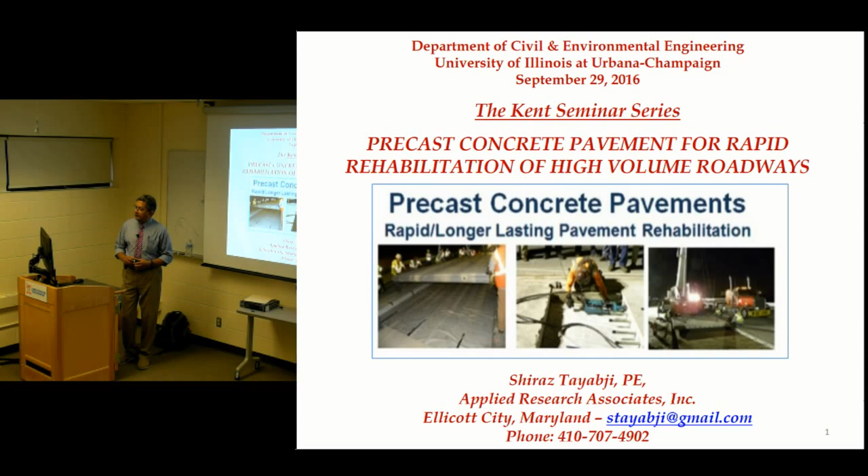But anyway, it's good to be here, and hopefully this discussion on this new technology will give you some hope for future work in this area. It's a developing area. So let me start.

This is a new, recent development, and this has been in place about 15 years. We are still developing and refining the technology, but a lot of people are not aware of it. So I'm just going to give you a pretty good overview of all the different aspects of this technology, instead of just focusing on one and going into much more detail.

We'll talk about the applications and the systems. When I say PCP, it refers to the precast concrete pavement systems. And then some technical considerations and design considerations, panel fabrication, and a little bit on performance as time permits.

I usually have more material for presentation, so as I see somebody raising a hand saying stop talking, I'll stop talking, or people start walking out of this room. So let me start. If you have some questions or need clarification, please raise them. We won't get into detailed discussion — we can leave that for the end.

So basically, the issue that I'm going to be talking about deals with our highway systems with a lot of heavy traffic, typically in urban areas.

How many of you are from the Chicago area? Or any urban city? How many of you have gone to Chicago? Okay, most of you. So what is one of the concerns if you are driving into Chicago? You worry about traffic, you worry about congestion. Even on nice days when there's no construction work, there's still congestion.

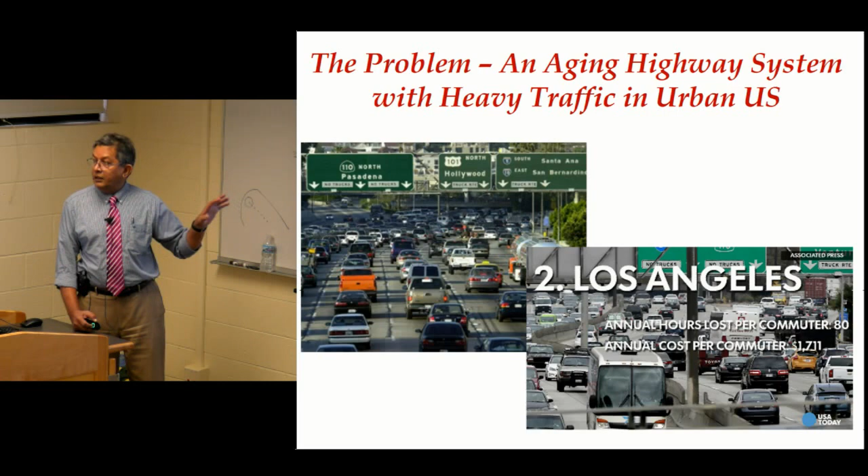So what we have been doing in the past, we need a solution for this rehabilitation. We have to upgrade our highway system, basically the pavements. We can't afford to do it the normal way, okay? Especially on the concrete pavement side.

So typically we say we can do short closures, typically nighttime work, and open to traffic by 5 or 6 in the morning. We have been using rapid setting concrete, but that has not always performed well. So we are always taking a risk, and we are coming back after a few months to a few years. So we are basically fixing the fix.

Now, if you want to do it correctly with concrete, and this applies more to rehabilitation of concrete pavements, we can get longer service life, like 20 years, 30 years. But we have to have longer closures because we need to cure the concrete for 3 to 7 days or more, and we can't afford to do that, okay? So the solution is short closure and longer service life.

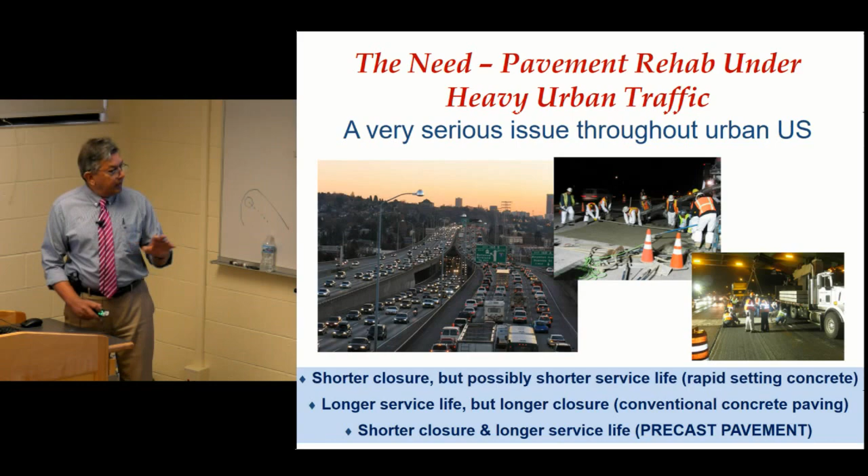And precast pavement, we know will be able to provide that. So we're looking for short closures, typically nighttime closures, but expecting a longer service life, okay?

So the definition of precast concrete pavement is a pavement system that is fabricated and assembled off-site. So we are casting the concrete off-site into panels, okay? Panels like this. So if you can assume this is a concrete panel, we are preparing it off-site, curing it off-site. When it's time, we bring it to the site, we place it, we can have traffic on it the next morning, okay?

So the system's components require minimal curing time because we are still using some grout and so forth, as I'll discuss later on, for the dowel bars and for under the panel itself. The curing time is like 2 to 4 hours, still during the nighttime, and we can still manage to open to traffic by 5 or 6 a.m. in the morning, okay?

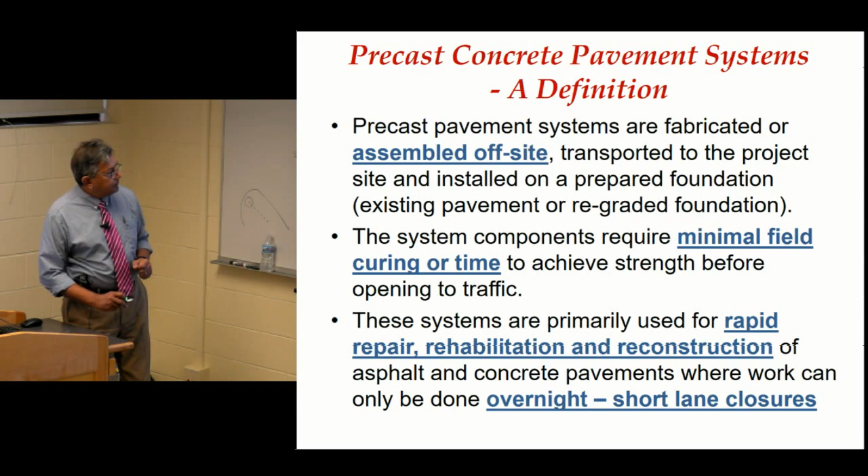So I'm talking about some applications and the systems now. This is a recent technology. We have been using it on a production basis since about 2001, okay? And it's used primarily for rapid repair, rehabilitation of longer lasting pavements or treatments.

If you can afford to close, this is slightly more expensive, but the costs are coming down. So if you can afford to close your highway and do conventional repair and rehabilitation, maybe this is not the right candidate. But if you do not have the time, or you cannot afford to do the lane closures during daytime, this is a candidate you have to consider, at least the highway agencies have to consider.

As I mentioned before, panels are fabricated off-site, transferred to the project site, and installed in a prepared foundation. Only minimal field curing time is required, typically nighttime work, short work windows. We basically start closing the lanes at about 8 p.m., and then we are expected to open it to traffic by 5 or 6 a.m., depending on location and so forth.

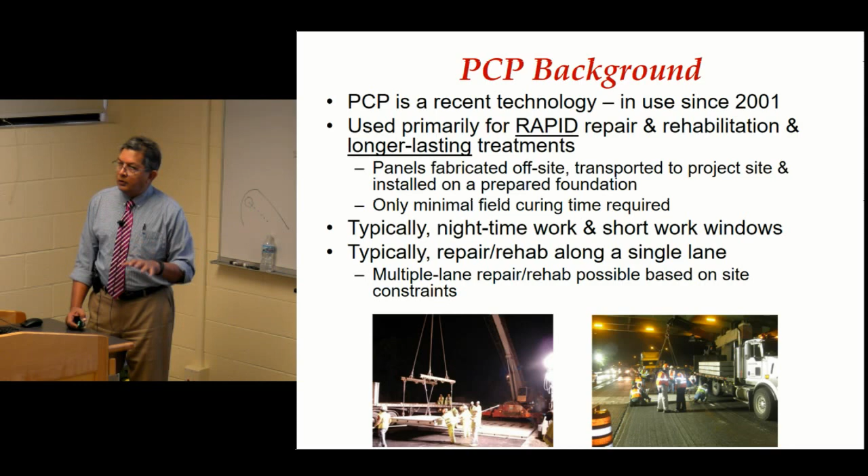Okay, so we are basically using this for heavily traveled mainline interstate pavements in urban areas, and also for ramps, where we have a single lane ramp in an urban area, we can't afford to close it, then we would be using this technique.

And we are also beginning to use it for intersections, bridge approach slabs, underpasses, bus pads, and so forth. Not much application yet on the airfield side. We have had 1 or 2 projects, but it hasn't progressed much yet.

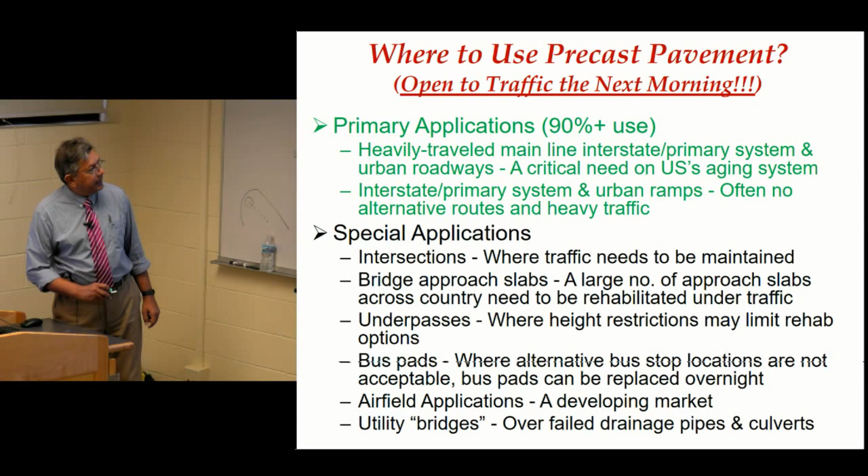So these are the states where we are actively using this technology. It's not something that's still experimental or in a development state. California, Utah, Illinois Tollway, New York, New Jersey—this is their bread and butter rehab technique. When they have a problem on their pavements, especially concrete pavements, or heavy volume asphalt intersections, this is their primary strategy for correcting those issues.

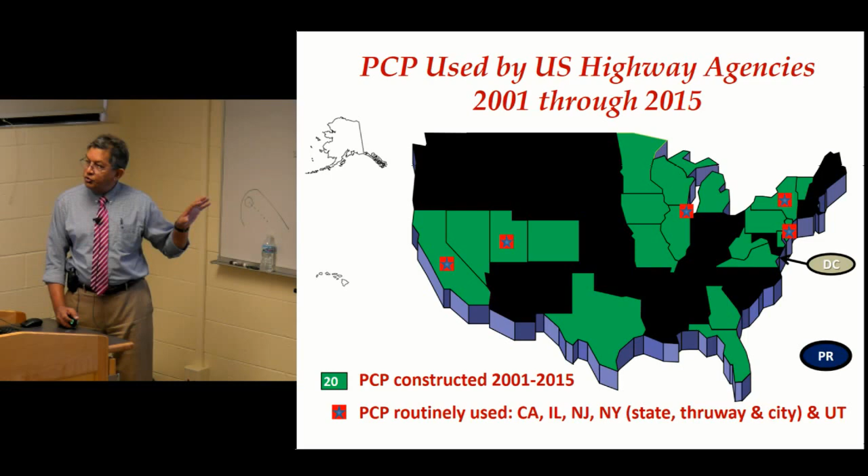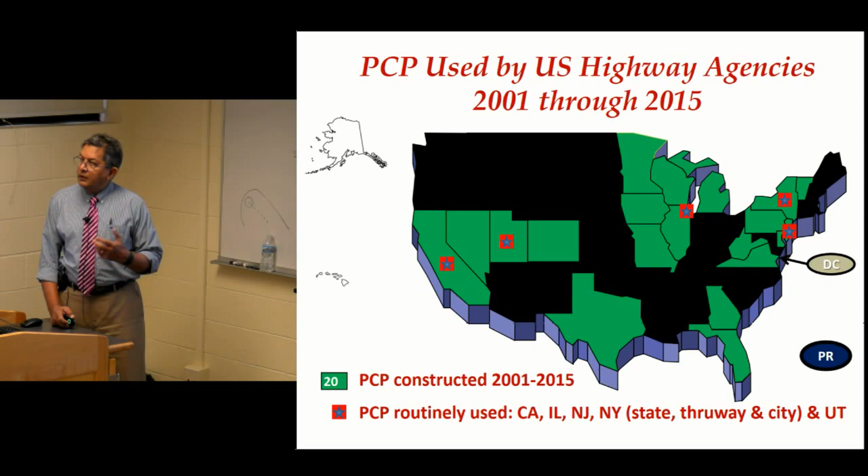The other states, shown in green here, they've already done some demonstration projects, and they're considering production use of this technology.

So this is the application. We are doing full depth repair, full slab replacement, or full depth repair where the problem is only at a joint. This is called intermittent repairs, or just repairs, or we would do continuous repairs, so a single lane replacement or a multiple lane replacement. Keep in mind, all of this work is being done at night.

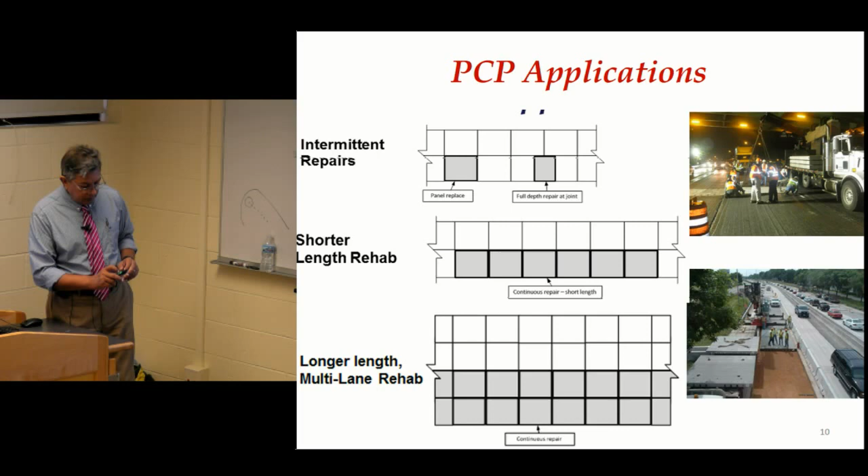Just another look at what we are trying to do. When we're doing the repairs, basically we are opening up the hole, taking out the damaged, cracked, or distressed concrete, preparing the base, installing dowel bars, and bringing the fabricated panel at full strength, placing it into the hole over the dowel bars.

This is one concept with the dowel bar slots at the bottom. In another concept, we have slots at the top. That also works. Then we come back and grout the slot hole with fast-setting patching material, and we also apply some bedding material, undersealing, so the panel makes full contact with the grade or the base.

Do you normally have a dowel on one end of the slab and then slots on the other? How does that work? In the repair application, we have dowel bars drilled and grouted at each joint face, and you'd have slots at both ends because we are just doing a single panel. When it's a continuous application, you'll have the slot at one end and the dowel bar at the other end. We just set them next to each other.

I'll show you the schematic, so that's where it is. This is the continuous application. We'll have a panel with dowel bar at one end and slots at the other end, and we can have slots at the top or bottom. Here there are slots, and this one has dowel bars. We would be patching or grouting the slots in a similar manner.

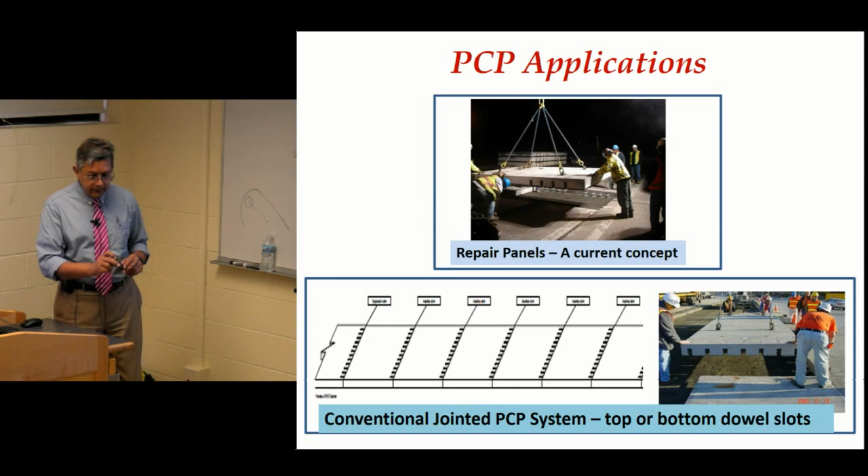Following up on these applications, for repair applications we are basically using panels that are nominally reinforced, just some reinforcement. Anytime we have a panel, we are going to be lifting it up with a 4-point lift. If we don't have reinforcement, what would happen? There's a possibility the stresses become high and we can have cracking.

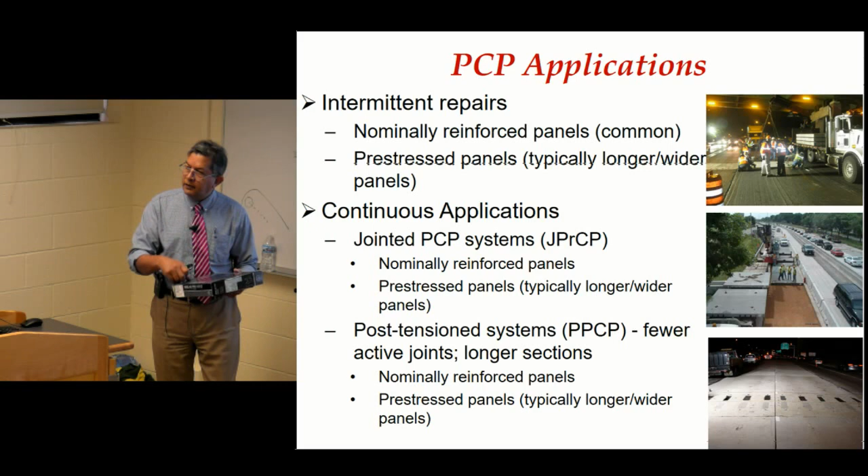When it's at full strength, maybe it's not an issue, but we are lifting this up the next day at 16 hours. So we place the concrete - I'll show you details later on. We are fabricating the panel one evening, placing the concrete, and the next noontime we are stripping the forms and lifting. So within 16 hours, we expect about 2,500 PSI strength. But we still don't want to take a risk of something happening to the panel and it coming crashing down on somebody, so panels are always reinforced.

As the panels get longer, or to save on reinforcement placement, the panels can also be pre-stressed. The wider, the longer the panels get, the stresses become too high, and we do pre-tensioning at the plant.

For continuous application, we have the same thing - we have jointed systems, which are individual panels, or we can have post-tension systems. With jointed systems, we have the same reinforcement in the panels or pre-stressing. For post-tension panels, we get a large number of panels together and then post-tension them at the site, so the panels are connected together. I'll show you the detail later on. We can have a post-tension length of about 250 foot, then an expansion joint, and another 250 foot.

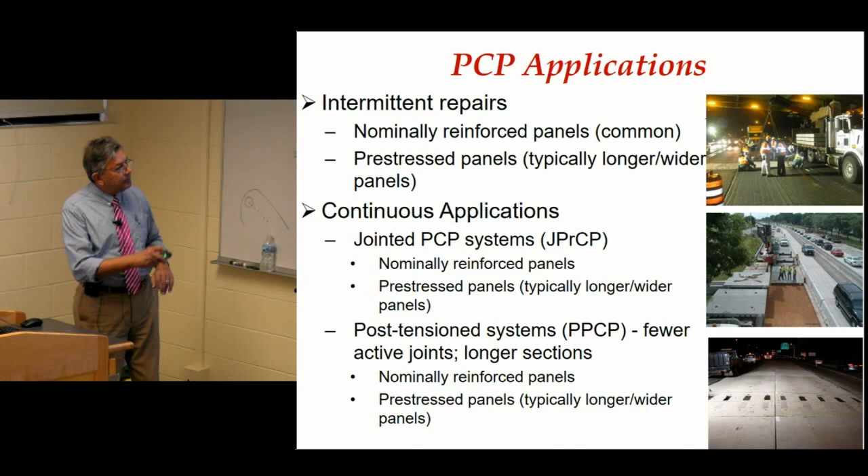So what does that do? It eliminates the intermediate joints. A lot of agencies don't like joints, so that's another approach to it. But it has not spread widely in use. We've had a few demonstration projects and one or two production projects, but it's much simpler to do the jointed system, so most of the projects now being constructed are based on the jointed system.

So just a quick application before we get into some of the details. We are doing slab replacement with individual panels. A few nights before, we would come in and make saw cuts, full depth saw cuts, to isolate the repair area. We'll come in the night of the repair, starting at about 8 p.m.

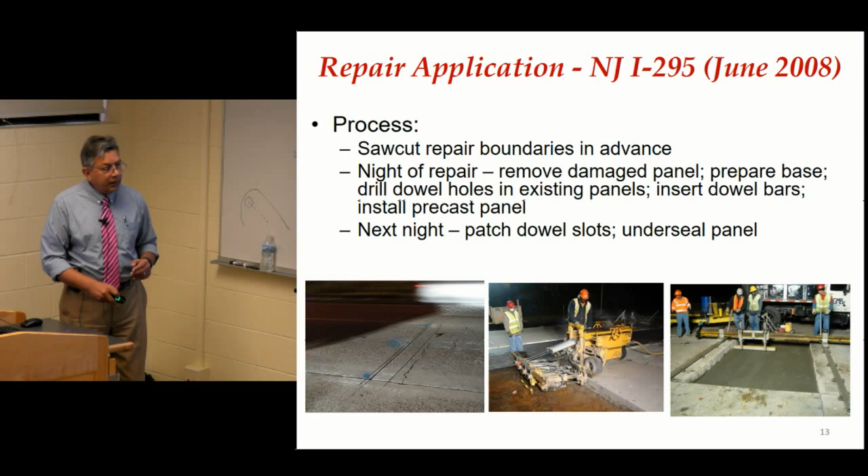Take out all concrete and prepare the base, drill the holes for the dowel bars, and get the base ready. Then bring in the panels. The dowel bars have been inserted, epoxy grouted. All of this happens that first night. The saw cutting is done a few nights before, but the panel removal, preparing the base, and installing the panel is done the first night.

This is that one concept with dowel bars, slots at the bottom on both sides in this case, and then open to traffic the next morning.

The next night we would come in and fill in the slot with the grout material, fast setting grout material, so it fills in the slot. And then we also do some undersealing under the panel. And we're back to operation.

Now if the contractor has timed it well, this second night's operation could also be done the first night. So you don't have to come back.

When we do this type of repairs, we can do about 20 repairs per night. They are spread out all over 2-3 miles, okay?

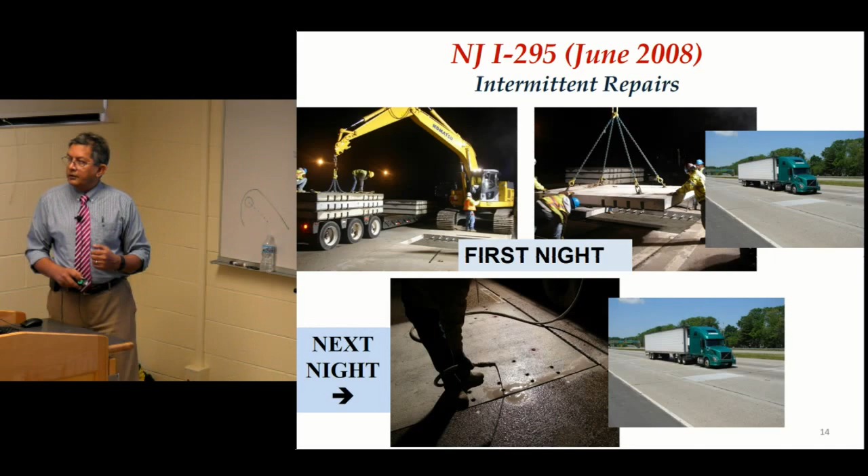This is the continuous application. This is the real project now, okay? In the LA area, Los Angeles area, this is the primary technique used to rehab their pavement system, a very old aging pavement system. Have you been to LA?

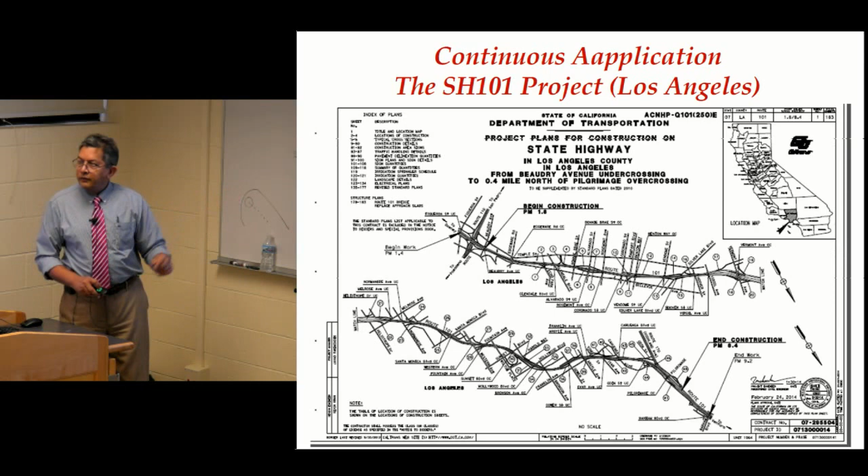How many of you have been to LA or seen the movies based in LA? You know what the traffic issues are. Most of the time it's a gridlock situation on the interstate system. So this is a project somewhere in downtown LA area with lots of segments that needed work. This is what it looks like.

So the idea is that every night the lane is closed, you take out 600 to 900 feet of length, remove all the concrete, replace the base, put in the panel, do all the grouting and everything, all within that one night. By 5 o'clock, you are open to traffic, okay?

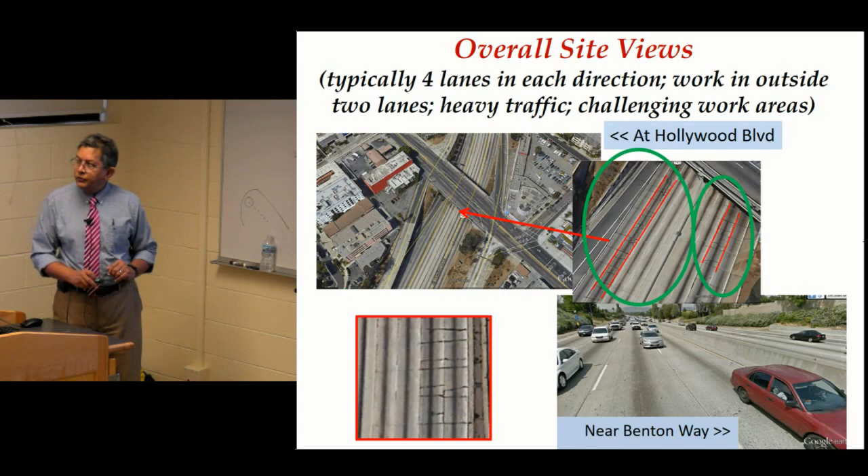And that's basically what we are trying to do. In most of the urban areas, this is a critical situation. So that's just to give you an example, quickly, before we get into the details, just to basically whet your appetite. So here it is.

We start at about 8 p.m. or so, starting with the lane closures, and start removing the concrete. We are also removing, in this case, the base, which is a lean concrete base. That's what they use in California. And then we prepare the base.

All of this is being done, and this would be at about 10 o'clock at night. Then we put in a lean concrete base, rapid setting lean concrete base, using a mobile mixer, about 4-5 inches thick, and finish it up. As soon as it's slightly set, we start bringing the panels. By the time the panels are ready to install, it's probably about midnight. So then we have 4 hours to install the panels.

We are installing the panel, one panel every 6 minutes, so we're installing about 10 panels per hour. In 4 or 5 hours, we're installing 40 to 50 panels. In this case, this was like an 18-foot long panel, so we're installing about 900 feet of new pavement every night.

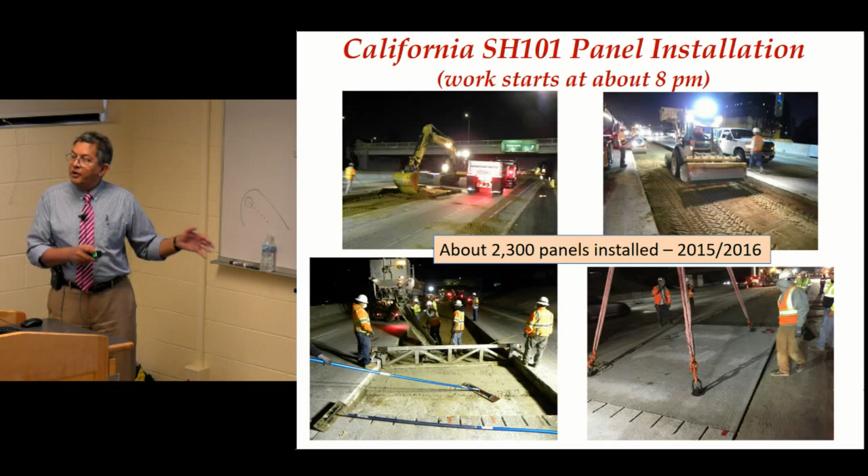So early in the morning, we are still finishing up the installation. Then we are doing some other activities. In this case, we are putting some bedding grout below the panel, which we'll discuss later on. And then by 5 o'clock or 5:30, we are open to traffic.

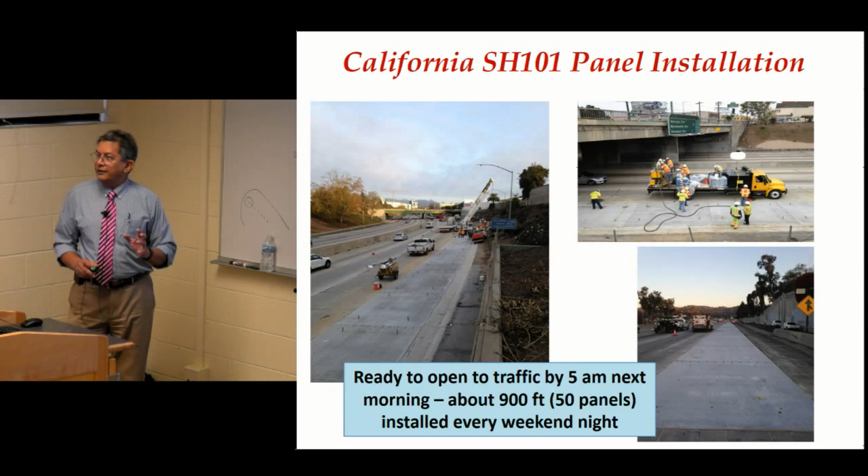We can't afford to delay it, because if you delay it with 100,000 vehicles per day on any of these segments, everybody's going to start making phone calls. Everybody has cell phones in their cars, so even though they're not supposed to use them.

This is another example, a slightly different, unique example: rutted asphalt pavement. This is a real section, a left turn, 2 lanes, left turn lanes. And this is going to a port facility in one of the southern states. So they keep fixing the asphalt every few months. They mill and replace it, and it keeps rutting, okay?

That's how much rutting it does within 6 months. So they've decided to do precast pavement replacement.

This project is coming up next year. In this 2-lane case, they're going to put 2-lane wide panels, eliminating the center line joint, and hopefully all this work will be done over 2 nights.

They have to maintain one lane needed for bringing in the panels, and then you need 1 or 2 lanes to carry traffic. So most of these places, we are only doing 1 lane at a time.

If you've got multiple lanes, we have done some 2-lane wide projects also. But this is unique, we've got 2 extra lanes that could be used for left turn traffic at nighttime. There will be less truck traffic at night, so it works out better.

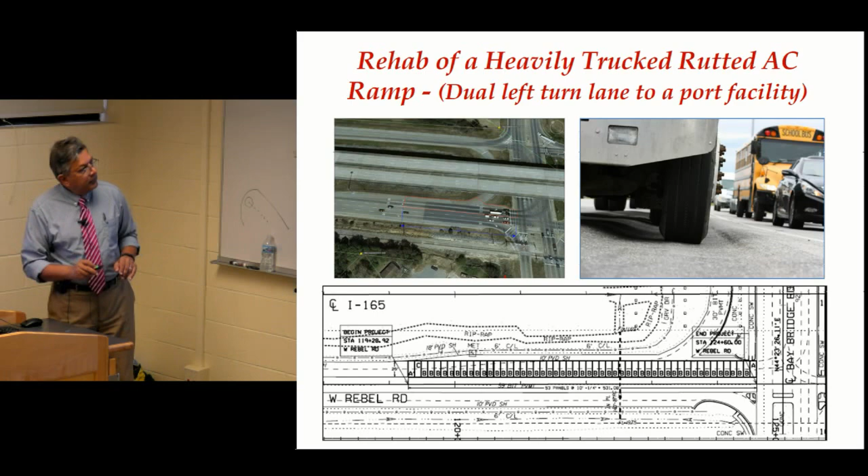Now we're getting into some technical details. So we have the panel, very simple. Anybody can do it. I can make a panel at home, okay. The difficulty is, what's the problem with the panel?

Smooth face, okay? We connect panel to panel without any load transfer, what happens? We've got zero load transfer, and we've got problems with deflections and faulting and so forth. So the first thing we have to do is provide load transfer.

Different schemes—typically we're using a dowel bar retrofit concept. We have a slot and a dowel bar. The slot can be at the top or at the bottom, as we saw in some of the slides presented before. So dowel load transfer is one thing.

The other critical thing is how to place the panel. We place the panel on the grade, and we have to make sure the grade is very well finished. That's one technique we refer to as grade-placed panels.

A lot of people don't like that because it takes too much time trying to get the grade level, and we may have to use some poor material like bedding material to provide that smoothness. So we don't like that technique as much.

The other technique is to bring the panel and put it on leveling bolts—4 leveling bolts. We leave a gap of about 1/4 inch to 1/2 inch. Then we don't have to worry about how well the base is finished. We fill that gap with a fast-setting grout material.

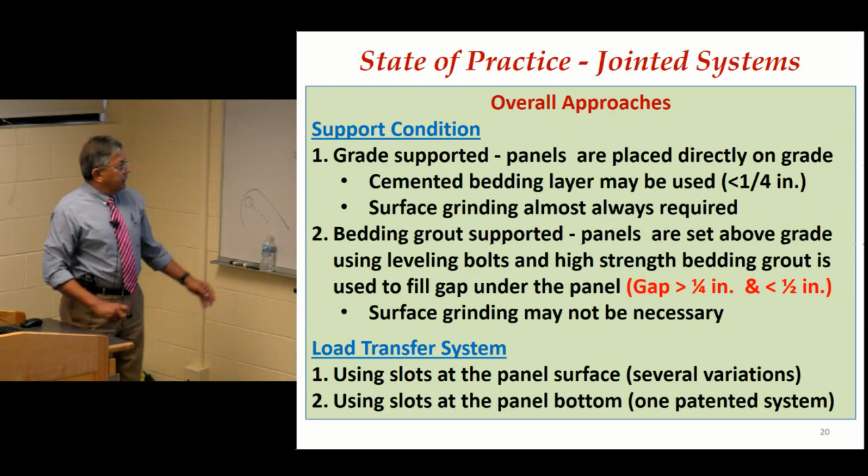I'll give you some examples now. This is the grade-supported system. Whether it's a repair application or a continuous application, we prepare the base and place the bedding material.

In the old days, we were using loose bedding material, which was unstable. Sometimes instead of a 1/4 inch, it would get to be 1/2 inch or even an inch, so basically we're placing the panel on very unstable material. That's what causes it—if you step on it, you can see your footprints. So even on paper we say it should be only 1/4 inch, but in practice it could end up being thicker.

So now we are using a cemented bedding layer, which is much more stable. Using a ready-mix truck, bringing the cemented sand—that's the technique we're using for the grade-place system.

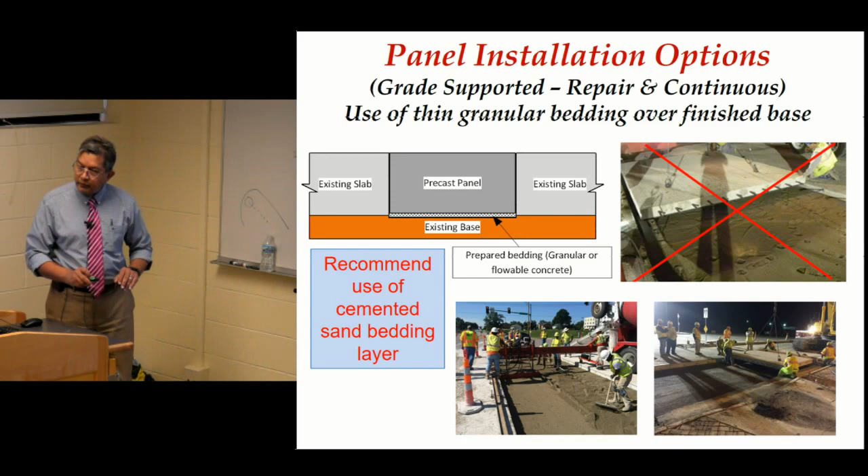This is the grout-supported system. We have the panels, we use leveling bolts, and leave a gap of 1/4 inch or 1/2 inch, fill it with the fast-setting grout, and then remove the leveling bolts. We're ready to open to traffic by 5 in the morning—the grout requires only an hour or so of set time to gain the strength needed to carry traffic.

This is LaGuardia Airport. Early on we did a project there, and that used a generic leveling bolt system.

We placed 4 plates for each panel, then used the leveling bolts to adjust the grade. You can see a surveyor here making sure the plates were level at the right elevation. We don't use surveyors for highway applications.

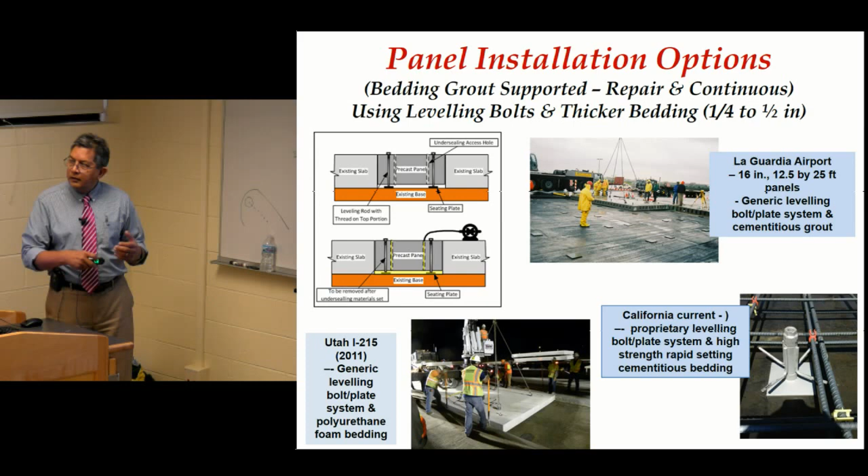So this is that second approach. Now we've got some pretty nifty gadgets to provide the leveling bolt system that are built into the panel itself, so we don't have to go and level the plates by hand. They're already built into the panel, and it saves us some time.

Okay, this is just for the repair application. Again, we are just doing a panel at a time repair. We can use strongbacks.

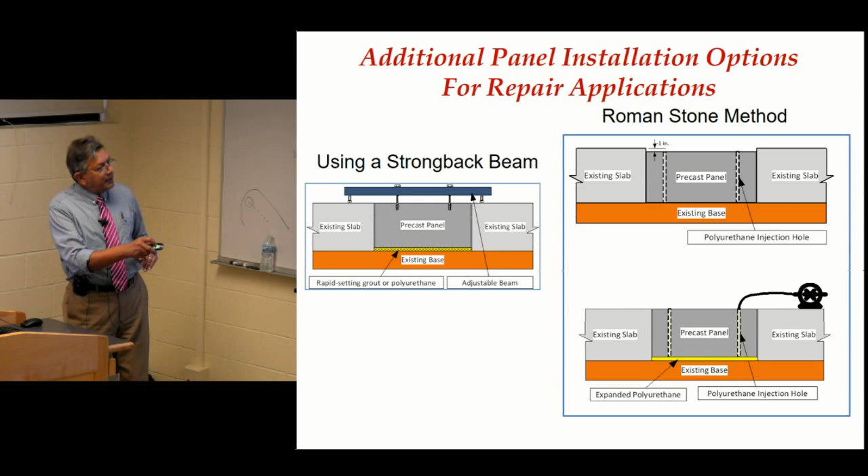There's another system where we bring in the panel, put it in the hole, and then apply polyurethane grout. The panel is sitting about an inch below the final surface. We pump in polyurethane grout, it expands, and raises the panel to the right elevation. Of course, we have to know how to do this, apply the proper grout material and so forth. And then you come back later on and cut slots to provide for the dowel bars.

Okay, so now we'll talk about load transfer. As we discussed, there are two techniques, slots at the bottom. We're always using some sort of a load dowel bar retrofit technique.

In the dowel bar retrofit technique, we go to existing pavement which is exhibiting poor load transfer at joints. We cut slots, we put in the dowel bar in the slots, and we fill it with the fast-setting material. We place about 4 dowel bars in each wheel path, and that should provide us good load transfer. So we're using a scheme like that.

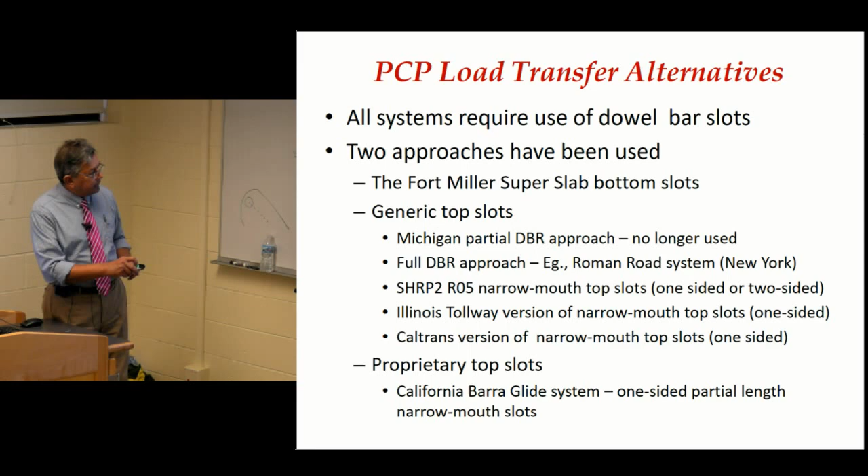So we have what we refer to as the bottom slot system. That's a proprietary system developed by the Fort Miller Company. And then we've got several versions of the top slot system. Most of them are generic systems, and only one is proprietary - I'll give you an example of that, a California developed system.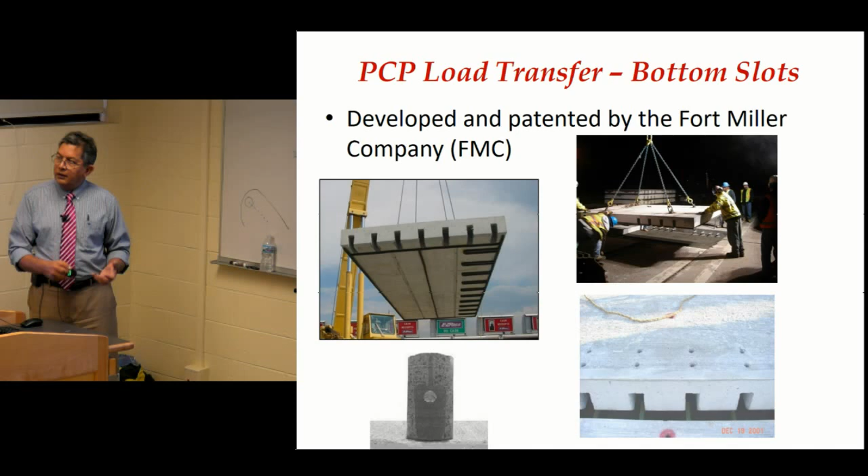This is a top slot approach now. Since that other system was proprietary, many of the states don't like to use proprietary systems, so a generic system was developed. In this case, we have a narrow-mouth top slot because even if this is not grouted the same night, we don't want to have wider slots that would interfere with traffic operation, motorbikes, and so forth. So this is referred to as narrow-mouth slots.

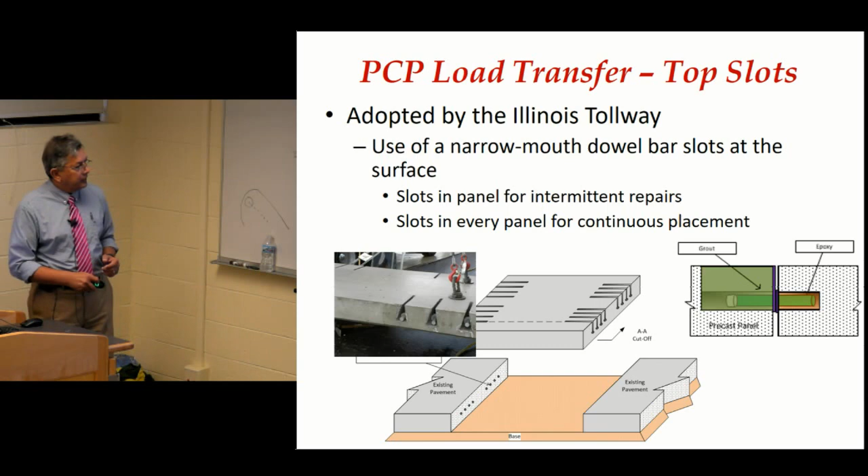In this case, basically our slot is the length of the dowel bar. So before the panel is installed, we put the whole dowel bar into the slot. Once the panel is placed, we have a hole in the existing pavement or an adjacent pavement, a new panel, and we basically come in and slide the dowel bar into the hole in the adjacent pavement. Illinois Tollway uses this system when they do repair and rehabilitation work.

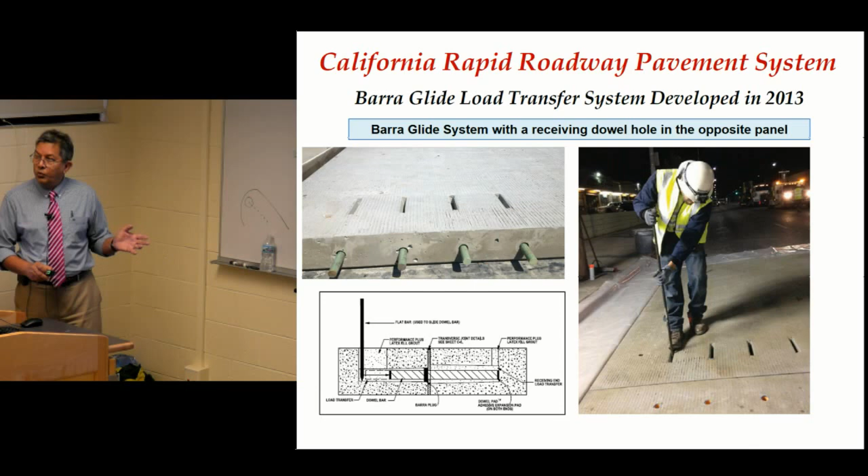This is another variation of that same scheme. Instead of having it partially open, this is the modified version of the dowel slot system where we have dowel bars at one end and the slot at the other end. In this system, basically we are placing this panel first, then bringing the next panel and sliding it into the slot. This is also very efficient.

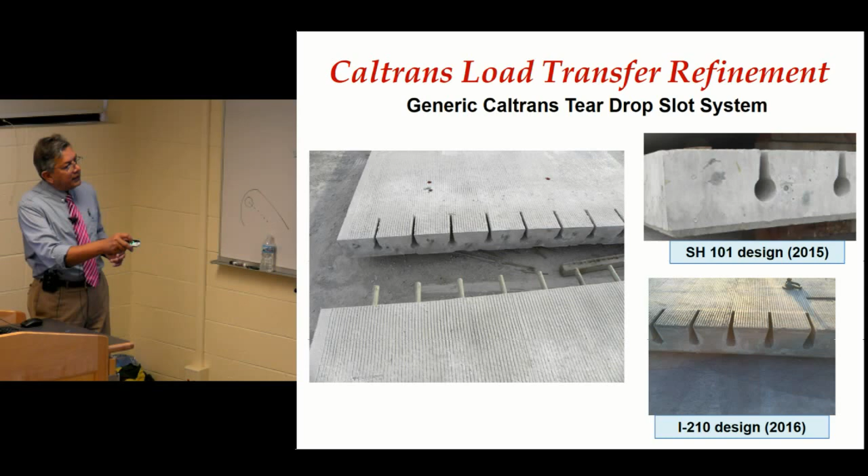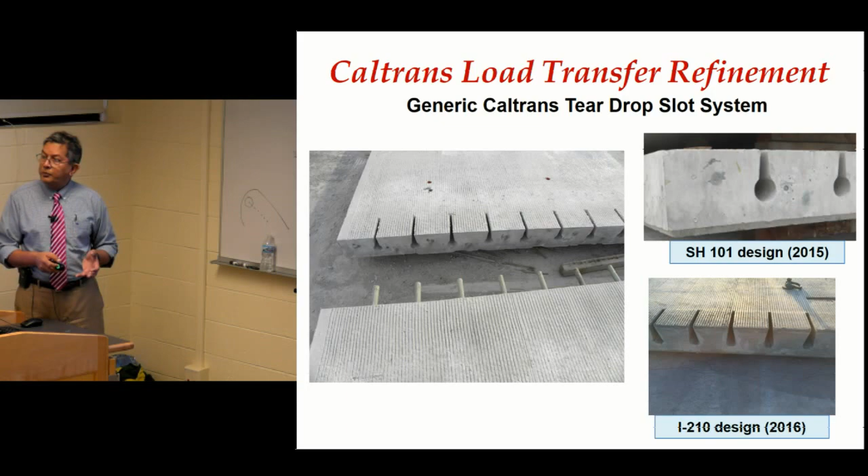We are placing about 50 panels per night with this system, 6 minutes per panel. That's a different variation, referred to as the teardrop slot design, and different contractors or precasters have come up with their own designs that work for them. But the idea is you have a narrow slot that widens out, so it's a wedge. Whether it's a bottom slot or the top slot, you basically have a wedge type system, so you are not necessarily relying 100% on the bonding, but bonding is there too.

This is the post-tension system. I'm just going to briefly describe the concept. So here we are bringing the panels, 20, 25 panels. They may be 10 foot long, but 12 foot wide or 2-lane wide. So we're bringing 20 to 25 of them together, depending on the length of each panel, and we get about 200 to 250 foot length.

That's post-tension. Different schemes, we are post-tensioning them from the middle, from the ends, and in the current version, we are leaving a gap, and as shown here, post-tensioning from this end to the other end, 250 foot away, or whatever that length might be. So what's the advantage of this? There are no intermediate joints, these are all very tight joints. And the disadvantage is we are left with an expansion joint, about 2-inch wide, that may require some maintenance in future.

What's the other big advantage of this? Where's our concrete expert? When we post-tension, we are inducing about 150 to 200 psi additional compression. So what's our concrete flexural strength that we designed for? About 600 psi. And for 600 psi, let's say our design thickness might be about 10 inches, but by adding 150 to 200 psi additional strength, we can reduce our thickness. So when we do the post-tension system, that 10 or 11-inch jointed system, the comparable post-tension system would be about 8 or 9 inches. So we are reducing the cross-section, we are reducing concrete use, cement use, more sustainable, et cetera.

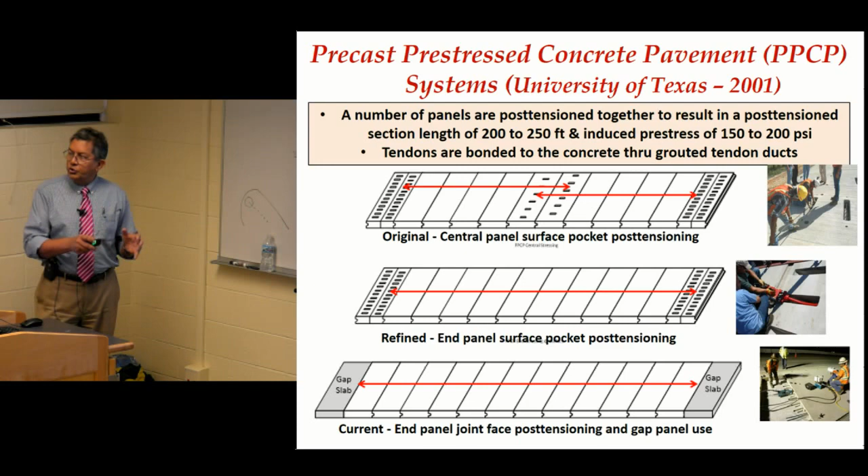Okay, so just for those who are techie people, some numbers. So we are using strands, 0.6 diameter strands, typically 80% ultimate load. So when we post-tension it, we are applying about 46,000 pound force. And that's sort of a safety issue, because if you don't have good anchorage, this whole thing can spring out of the ductwork. And we have seen tendons doing that, they just get out like a spear. And if you are hanging nearby, that wouldn't be nice.

The pre-tensioning, when we do the pre-tensioning at the plant, typically we are using only 1/2 inch diameter strand, just to have it be more efficient in terms of fabrication, because then we don't have to use reinforcement.

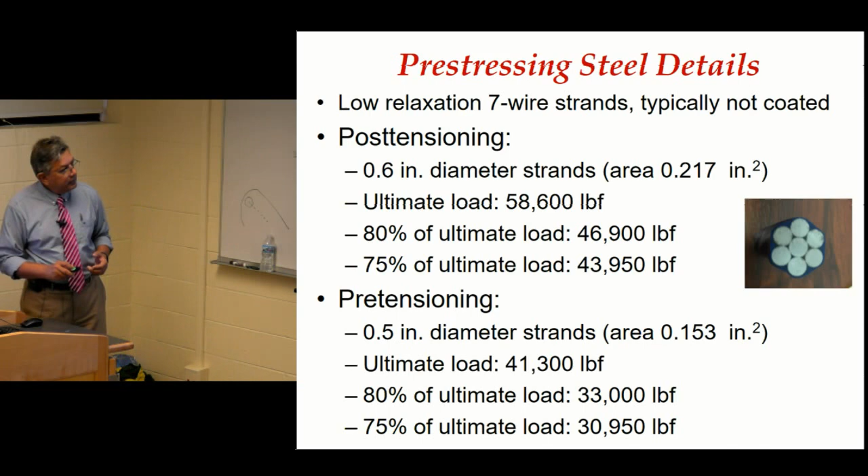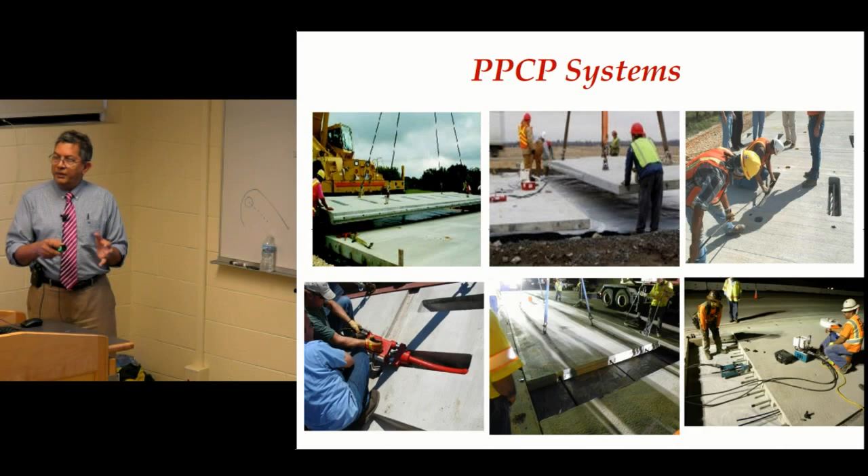So just a quick comparison between the precast jointed and precast pre-stress. As I mentioned before, the conventional could be 10 to 14 inches depending on truck traffic. With the precast pre-stress, you can use 8 to 10 inch thick panels only. Joint spacing is 15 foot typical, here 150 or 200 to 250 foot. The difference is an expansion joint is needed. Typically we have to leave some gap when we place panels, because we can't place panels in a very tight space.

So for the jointed system, we are leaving about a quarter inch up to 1/2 inch maybe sometimes. For the precast pre-stress, we got longer post-tension sections, about 200 to 250 foot, so there's more expansion and contraction taking place. So you have to go up to 2 inches in your expansion joints.

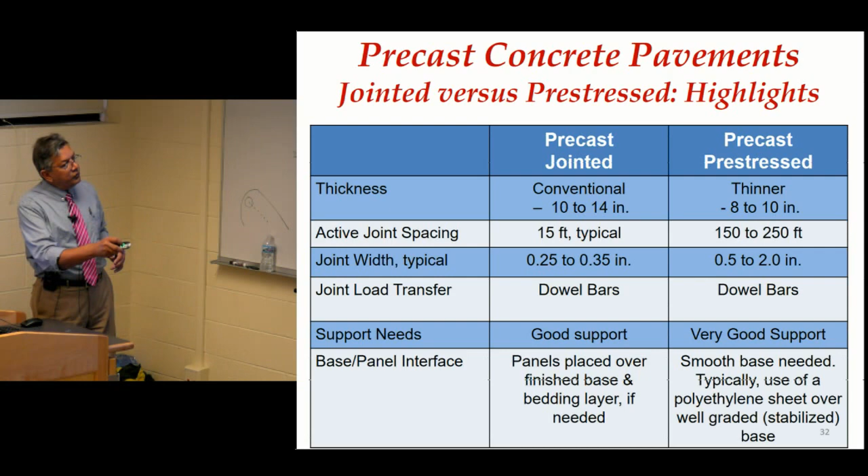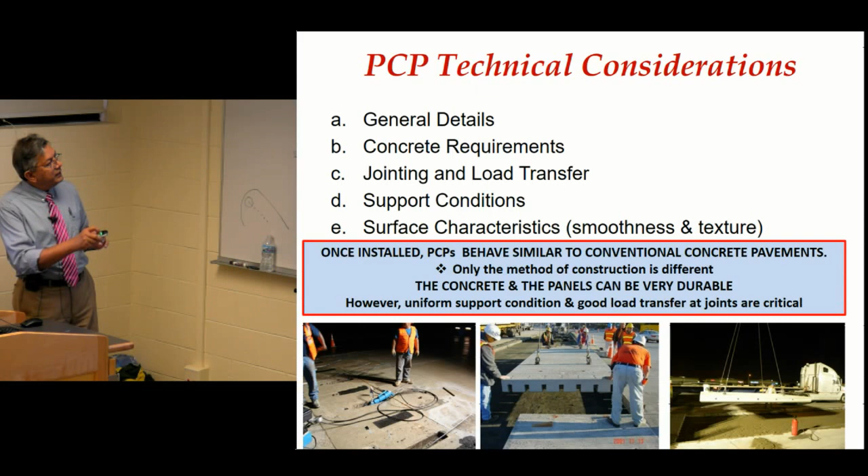Okay, very quickly, technical considerations. So typically we talk about general details, concrete requirements, jointing, load transfer, support conditions. Some we have already discussed, and the surface characteristics.

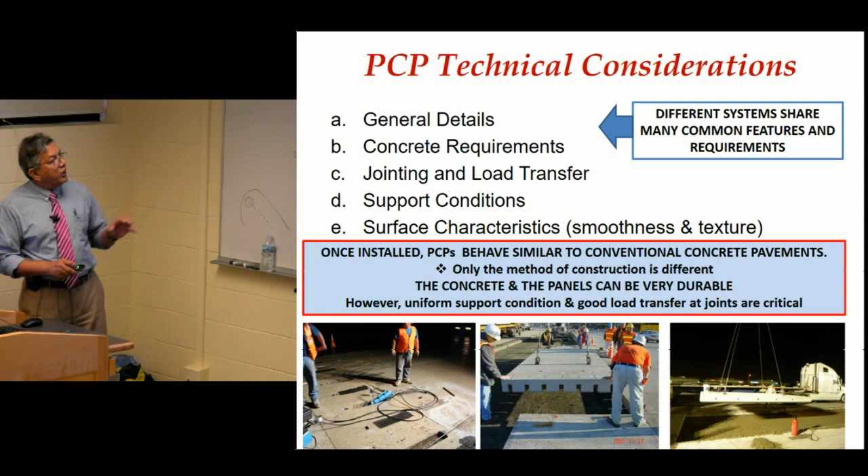We have different systems now that have been developed and being used, and most of them have very common features. The general details are very similar, concrete requirements are similar, but this is where many of the systems differ, how they provide load transfer, bottom slot or top slot, how they provide support condition directly on the grade or the gap supported, grout supported system.

The other thing I want to point out is, once installed, these precast panels behave just like any other jointed pavement. The advantage here is that the precast panels are reinforced or pre-stressed. So if a crack develops within the panel, it's going to be held very tight. There's a higher amount of reinforcement we use, and so we are not going to see any significant distress in future at these crack locations.

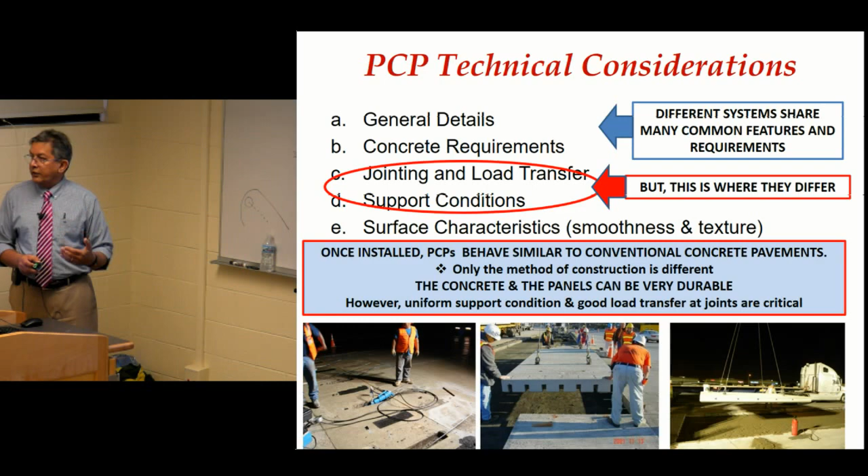So this is basically what our expectations are from the precast concrete pavement, very similar to newly constructed pavement or new design. We are looking at for repair application at least 15 to 20 years instead of going back every few years. We are not doing fix the fix anymore. For continuous applications where we are doing miles and miles of this, we are looking at a service life of 40 years, not 2 or 3 years and then coming back with some other treatment.

Pavement failure would be a result of traffic loading. That's what we design our pavements for. We don't design it for some screw up by the contractor or because somebody used bad material or bad concrete. We shouldn't have any failure from any other reason than what we are designing for, that is millions and millions of truck load applications.

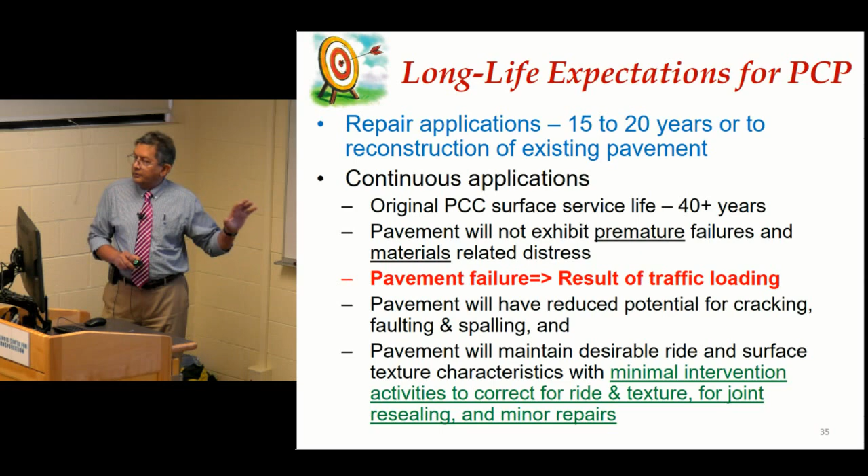The pavement will maintain desirable ride and surface texture characteristics with minimal intervention, because this is a high volume roadway situation, we can't afford to go back and keep fixing the pavement. So the only time we would have to do it is to correct for ride and texture, maybe every 15, 20 years or so, and these are not significant repairs that require too much lane closure. So keep in mind the lane closure and the extent of lane closure is the key item here that we are trying to eliminate or mitigate.

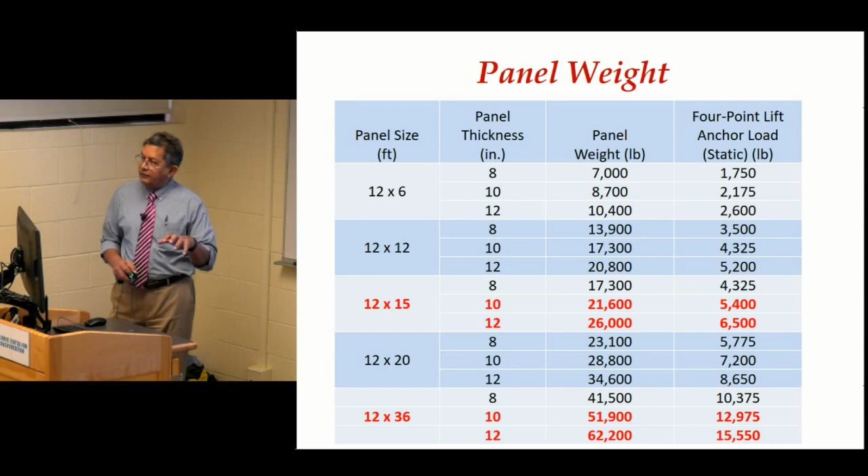Again, very quickly, for those who like numbers: a 12 by 15 panel, very commonly used, 10-inch panel, the weight is about 21,000 pounds. The 12 by 36 foot panel that I was showing you before, if it was 10-inch thick, that's about 50,000 to 60,000 pounds, depending on the thickness. So it requires a good-sized crane for most of this work to be positioned at the site.

Also, I mentioned before that if you are casting the panel, the next morning we are stripping the forms and then lifting it, it develops some stresses because of the weight of the concrete itself. When it's a small size panel, any of this 10-foot length, 12-foot wide, and so forth, 12 by 12 or 15 by 12, the tensile stress that's developed is very minimal. So within one day, the concrete strength can accommodate it.

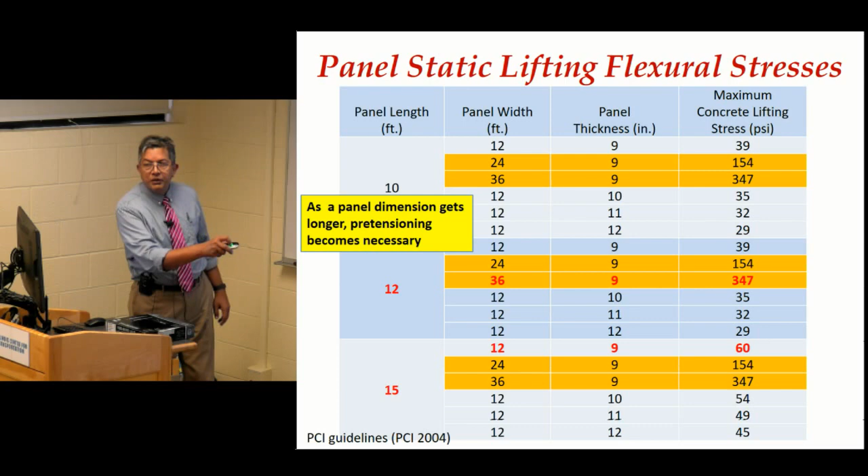But we still provide reinforcement because we don't want to take chances. Once you go in the length or the width, our stresses become high. So at 24 or 16 hours when we strip the form and we are lifting it, if it's a long panel, the stresses are high, and we have to make sure the panels are pre-tensioned at the plant.

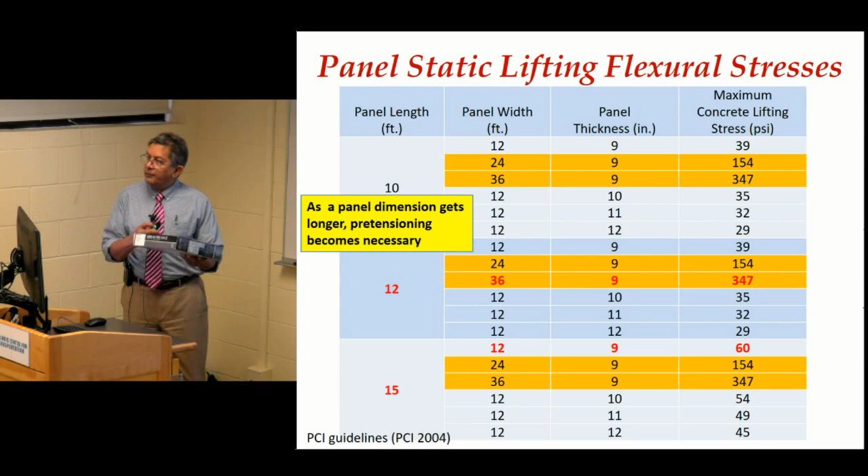So panel handling, as I mentioned, it's four symmetrically offset locations. The inserts are located, and they're built into the panel itself. As you can see, 1, 2, 3, 4 panels properly aligned, so it minimizes the stress development. This is at 16 hours, the stripping is done, so the panel has to have sufficient strength to be able to be lifted and then moved.

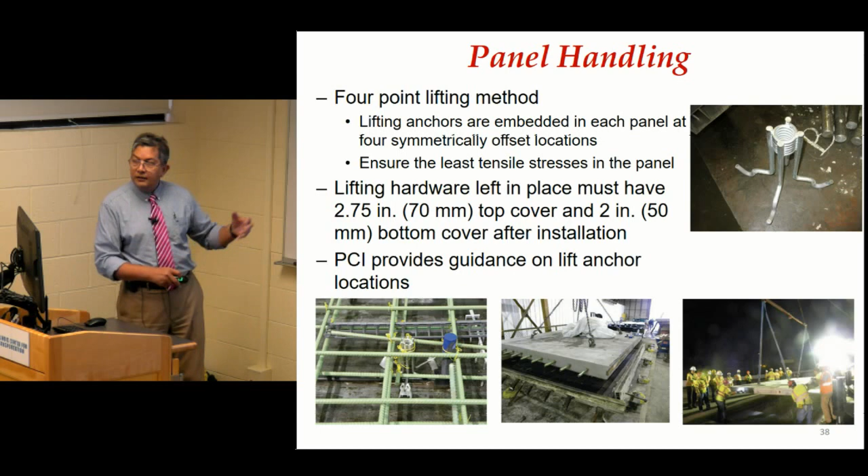This is the 36-foot panel. So you can see there the stresses would be much higher, and these panels were pre-tensioned at the plant. Some other technical details: we talk about the load transfer at the joint.

In the past, we used to talk about load transfer efficiency. How many of you have done deflection testing, FWD testing? Few of you, okay. So basically at the joint, we're looking at how well the dowel bars are transferring the load. If it's 0%, that means there's no dowel bar action taking place. Maybe we don't have any dowel bars.

So if you place panel to panel, smooth face, there is no load transfer, it's zero load transfer efficiency. When we put the dowel bar in new construction, we get typically 95 to almost 100% load transfer. That means when you place a load here, it's transferred to the other panel, and both are helping carry the load. If there's no load transfer, only one panel is carrying the load, whether it's new pavement or precast pavement.

Okay, so that's basically what this figure shows. And the other sketch shows the load transfer carried - what's the axle load? Who plays around with equivalent axle load or truck axle load? What's the legal limit? Keep it simple, 20,000 pounds, single axle load. When the axle load is at the joint, how much do you expect it to transfer to the other side? If everything is nice, 100%, 50% of it.

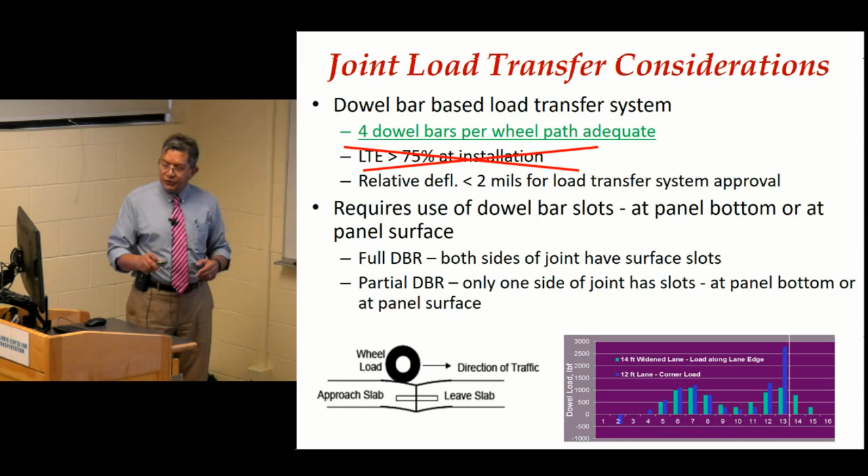So panel support condition - when we're doing some rehabilitation work, typically we're just taking out the concrete or the asphalt surface. If it's a granular base, we may just rework, compact it, and regrade it, sometimes using a bedding material. If it's stabilized, a cement-treated base, the problem is in the concrete - we take out the concrete, then trim the cement-treated base to make sure we've got proper thickness for the panel. We don't want to bring the panel and find the concrete was shy at that location and the panel stands up half an inch or 1 inch.

Because that happened in our early projects - we didn't do enough coring to determine the existing pavement thickness, and we bring in the panels and they're sticking out. Keep in mind at 5 o'clock in the morning, we have to open to traffic. You can't have one lane sticking up compared to the adjacent lanes. So now we typically recommend the trimming, and sometimes apply the bedding material - a fine-grained cemented material or thicker layer of rapid setting grout if you're using the leveling lift system.

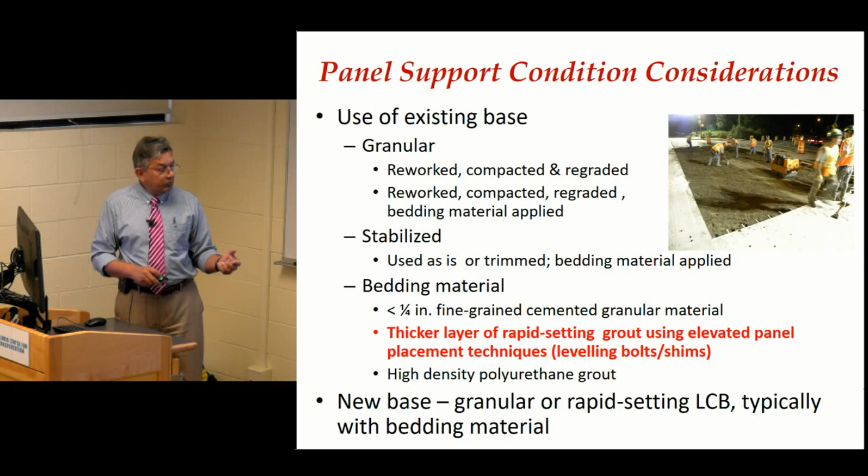In California, whenever they do this rehab, they're looking at the 40-year life, they take out the existing base and put in a new rapid setting lean concrete base. And again, this is all possible during that one night of lane closure.

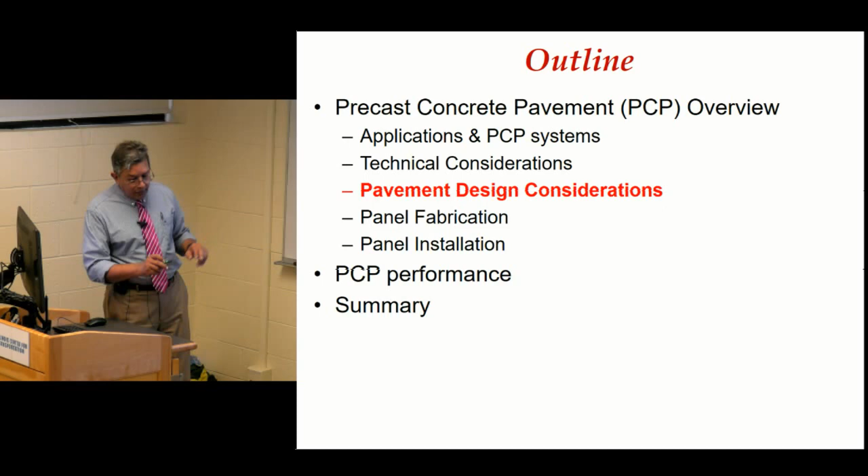So quickly, pavement design consideration - for repair application, keep in mind we're going to go in and cut out the hole, okay?

Longitudinal joint here, longitudinal joint here, and we're going to make transverse cuts. We bring in a panel, there is no way we can bring in a panel and try to place it in a hole that's precisely the size of the panel. That's just physically impossible. So we bring in a panel that's perfectly dimensioned.

That's a 12 by 12. The tolerance may be an 1/8 of an inch. We cut a hole - a saw cutting crew cutting a hole. They're following the existing longitudinal joint that was cut in the concrete a long time ago, 40 years ago.

We don't know how straight it would be, okay? And then we are making a transverse cut at night, maybe using laser - as Marshall likes to say, we measure with a micrometer and then come back and cut a saw cut that's 1/4 inch wide. So even if you precisely measure it, the saw cutting guys are not going to be that precise. So when we put a panel in, we are always going to deal with some gaps, okay? Typically we say not more than 1/2 inch.

We can't control the longitudinal joint as much because we are cutting it with whatever joint was there during original construction. This could be 12 foot, or it could be 11 foot and 11.5 inches. So anyway, we are leaving some gap here. That's by design, okay?

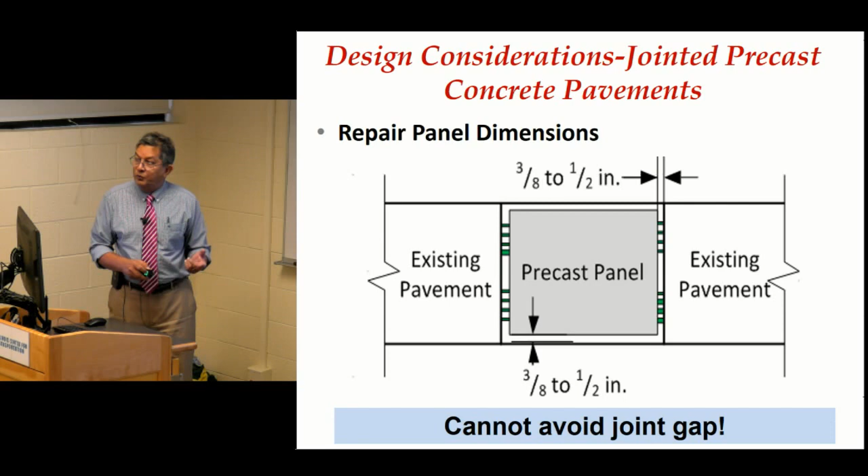In the continuous application now, we don't have to worry about the saw cut here. We're taking out about, let's say, 600 to 900 foot, and we can bring the next panel next to the previously placed panel. We can control the joint width, let's say 1/4 of an inch. But we can't control what happens to the longitudinal joint. We may end up with a 1/4 inch, 1/2 inch, or even 1 inch many times.

So that was the dimension. So panel thickness for the repair applications - we are basically putting the panel to replace an existing panel. So whatever the slab thickness was there, we are using the panel with that thickness.

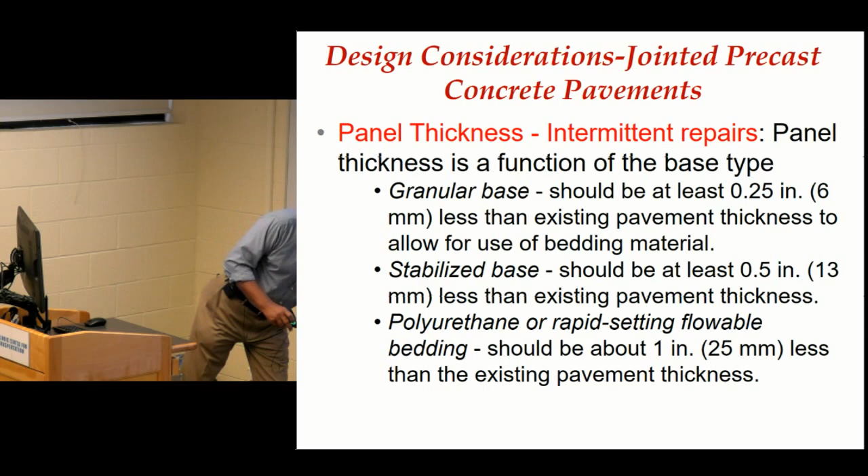For continuous application, basically we are doing a typical pavement design, and whatever is required - 8 inches, 9 inches, 10 inches, or 12 inches, depending on the truck traffic. So typically, our thicknesses tend to be 10 to 14 inches for jointed system. If it was a post-tension system, it would be less by 2 to 4 inches.

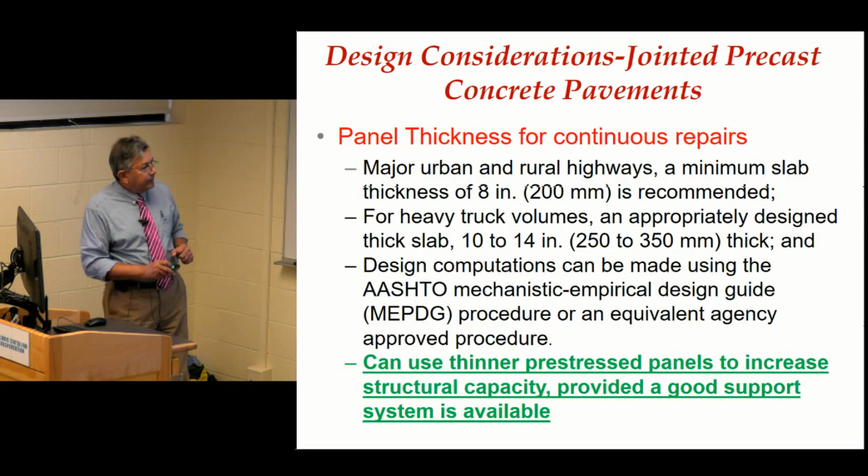Concrete strength, typically very similar to what we specify for cast-in-place or new concrete pavements - 650 psi. But keep in mind, as I mentioned before, we are stripping the forms at the plant at 16 hours. So we require the contractor or precaster to use a slightly higher strength, so they can achieve that 2500 psi within 16 hours. So by nature of that, we get slightly higher strength in our concrete.

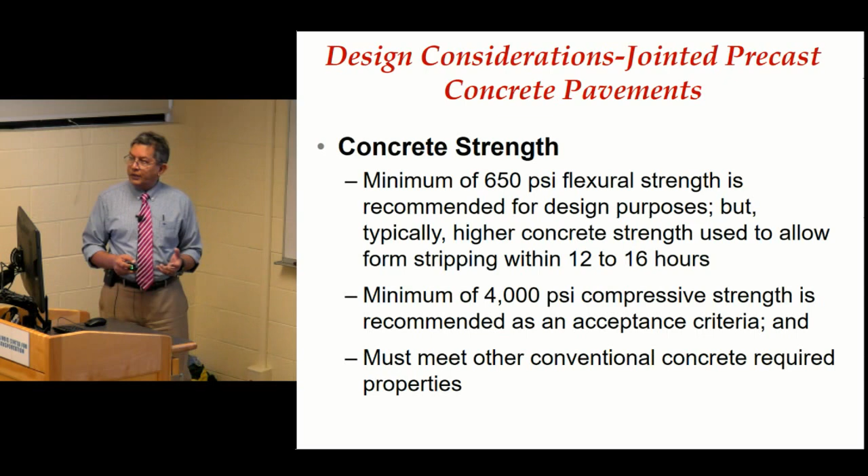Joint design, again, for repairs, it is whatever it is - the slab dimension, we are just replacing that. Or if it's a joint, we may cut out about 6 foot or 8 foot. If it's a crack, again, it would depend on the condition of the panel.

For continuous repair, basically, we're using the 15-foot joint spacing on most of the projects, 15 to 16 foot. Some contractor might say, well, I can speed up my production if I go 16 or 18 foot. There's nothing wrong with that, okay?

Load transfer - we talked about typically 1 1/4 inch, 12-inch center, but we are using just 4 and 4 on most of the projects. We don't need continuous spacing of the dowel bars, 11 or 12 per joint. And 14-inch dowel bars - we know exactly where the dowel bars are going to be placed.

For cast in place, we use 18-inch dowel bars, and typically we need about 7 inch of the dowel bar on each side of the concrete. So we typically say 7 and 7 is 14. So we are giving the contractor about 4 inches to make a mistake where they cut the joint, okay? But as long as we get 7-inch embedment, we're okay.

For the precast, we know exactly where the joint is. So there's no point in using that 18-inch long bar. We just need 7, so 7 and 7, we just use 14 inches.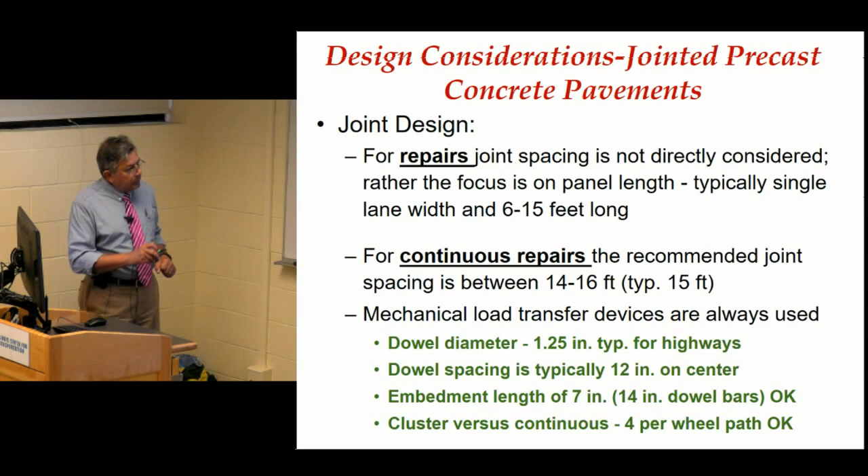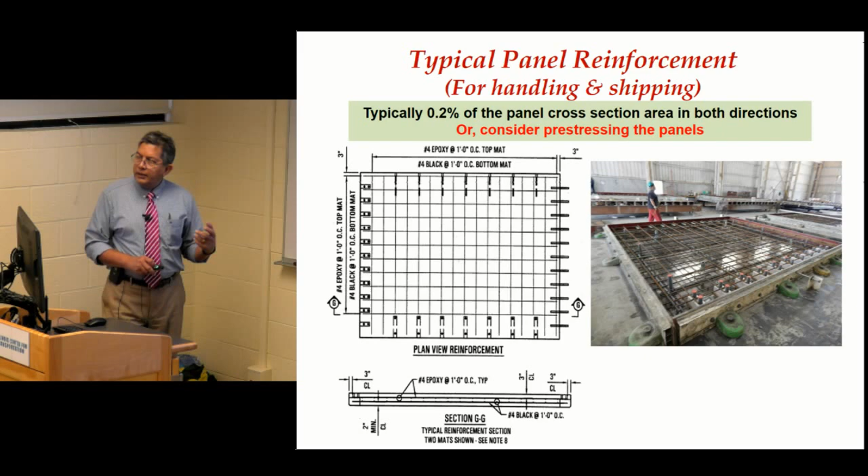Very quickly, panel fabrication. We can do panels in a precast plant. In the plant, they have a bay where they can put in only so many forms, typically 6 to 8 panels per day. So every day they are doing 6 to 8 panels.

Normal concrete strength testing, they're using a workable mix, about 6-inch slump, consolidating it, finishing whatever tining is required. Then 16 hours for stripping the forms, lifting it out, and then curing and finishing operations.

So that's the reinforced panels. This is the pre-tension panels now being fabricated. Here, the precaster may have long beds, 300 foot plus, so they can actually fabricate about 15, plus or minus, panels per night or per day.

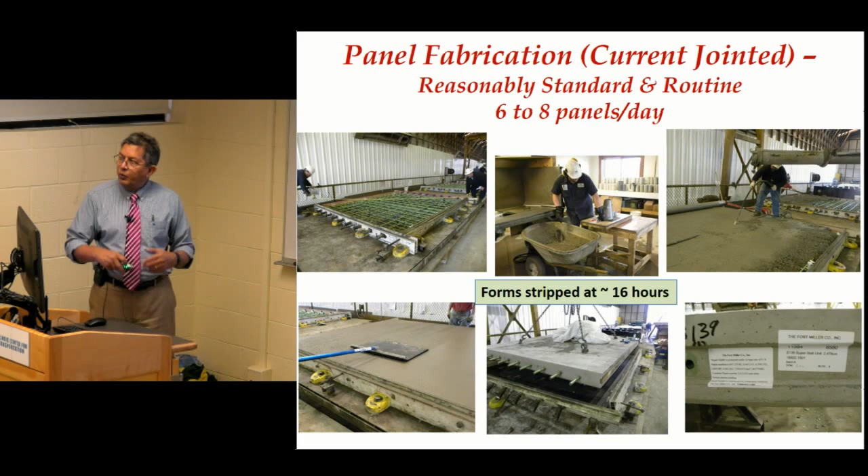The advantage here is he doesn't have to do the reinforcement. All that reinforcement requires a lot of labor. In this case, pre-stressed panels just require threading a set of tendons from one end to the other, maybe 6 or 7 tendons for a 12-foot wide panel.

It takes care of all the panels, 16 panels. They jack up the load, pour in the concrete. They're still doing some other work for all the ports, grout ports, and so forth. This is the leveling lift system, so they still have to do all that positioning. But they save a lot of time not having to do the reinforcement.

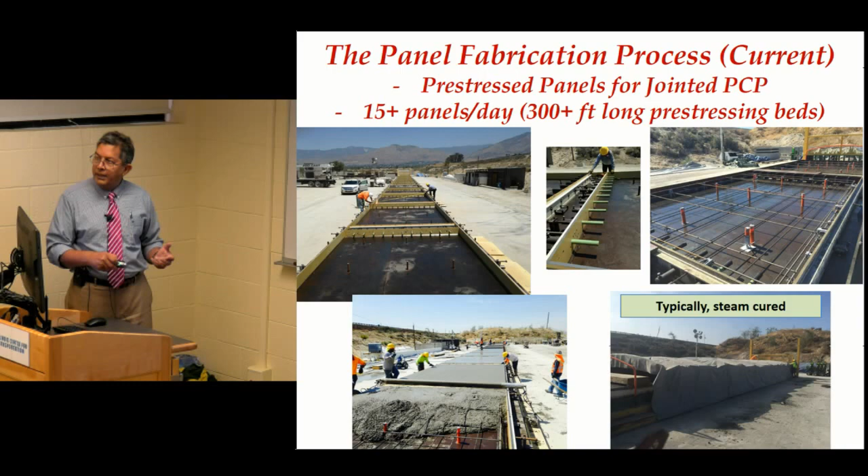And then they come in, place the concrete, and come back and cut out the tendons at every location, basically cut and burn out the tendons. Sometimes they also do steam curing to accelerate the strength so they can lift the panels the next day, since this is being cured outside.

Once the panels are fabricated, after the finishing operation, they're taken to the storage site and cured for about 7 to 14 days before being shipped to the site.

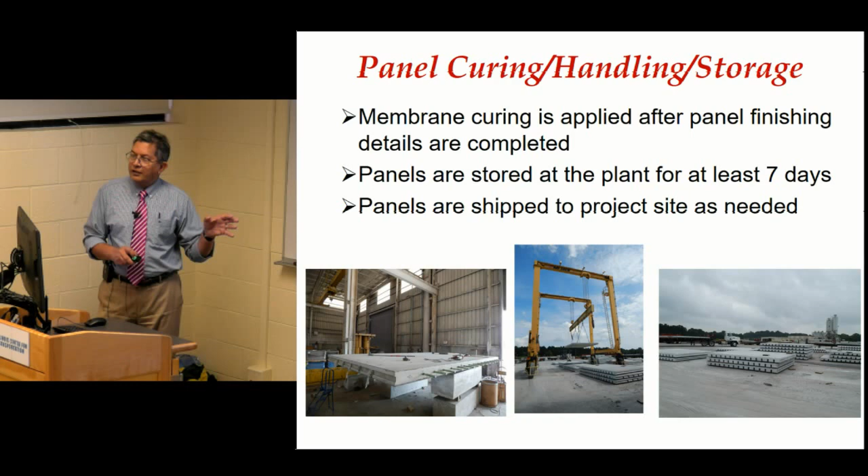We've got projects using 2,000 panels. There's one project under construction in the LA area with 7,000 panels. If we're fabricating 15 panels per night, that takes many days, so on many of these projects we have to prepare several weeks or months of backlog of panels beforehand, because once we get to the site, we are chewing up 40 to 50 panels per night.

So when we are doing repairs, we can do 15 to 20 repairs, continuous, jointed, doing 40 to 50 panels per night. Depending on the panel length, we can do up to 900 feet. Long time ago, I set a goal that if we can do 1,000 feet per night, we'd be doing pretty good. We're already meeting that length. If we have 2 crews working side by side, we can double it.

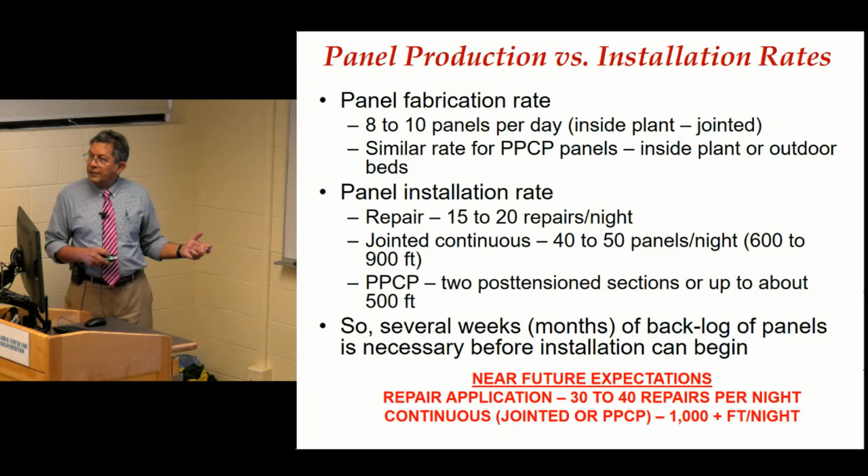So, quickly, panel installation. A lot of items we have to take care of. Now we're at the site, we've got the panels fabricated. Of course, we have to do maintenance of traffic, on-site equipment management, emergency management, et cetera.

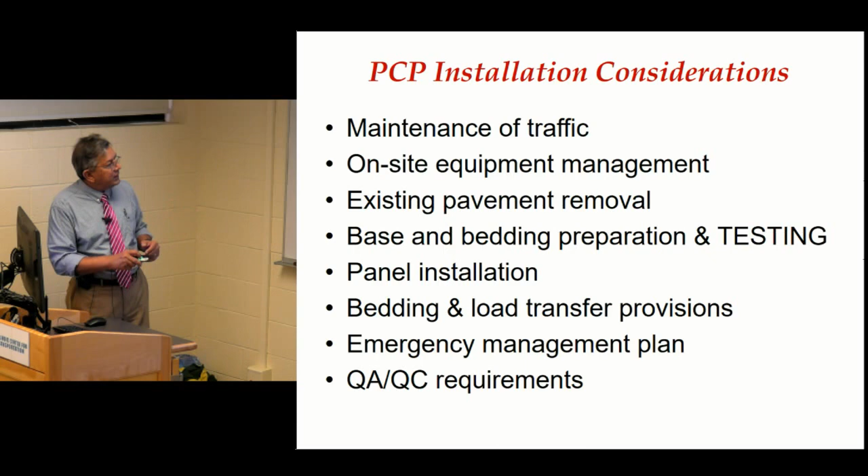I'm going to hurry up and just give you some examples of installation. We are taking out the concrete under traffic, with a truck passing by, so 1 or 2 lanes are open to traffic. One end we are working on, another lane we are bringing in the material.

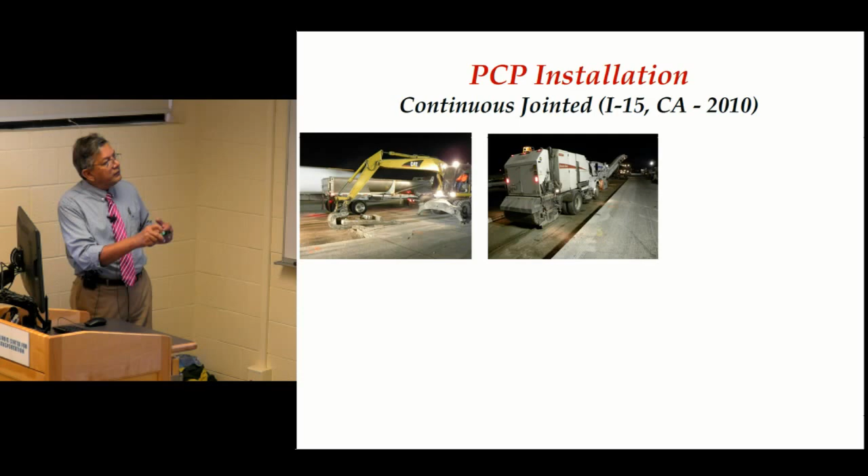In this project, they had a cement-treated base and decided to leave it in place, so they're trimming it, placing some bedding material, and roller compacting it. In a longer hole, you can afford to do that; if you're doing a single panel, you can't bring in a roller, so you use a plate compactor. Then bringing the panel and opening to traffic by 5 in the morning—as you can see, heavy traffic already, so you can't afford to delay it.

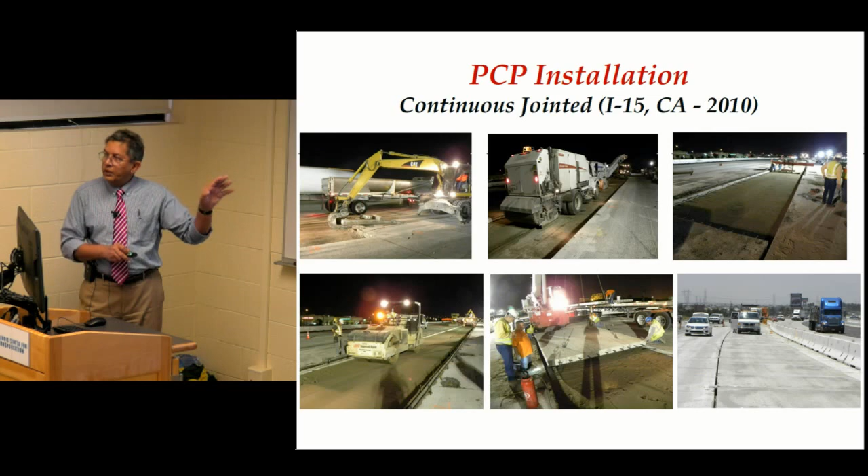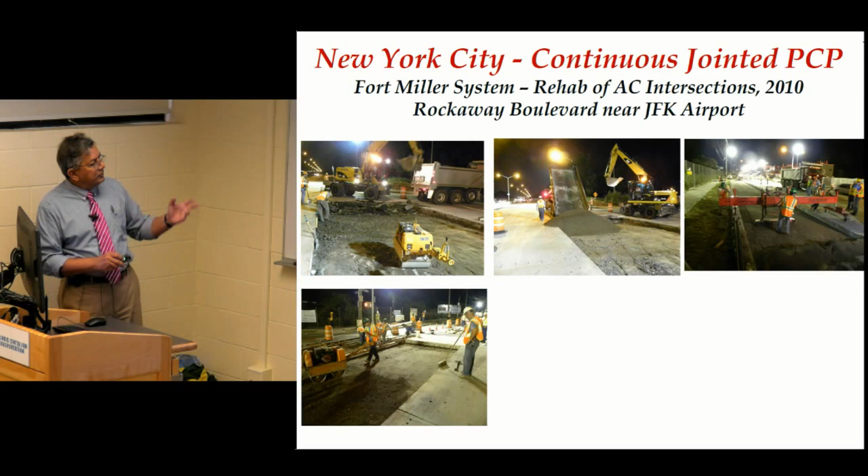This is another example, an asphalt intersection. You're taking out the asphalt, bringing new material and new base, finishing the base, bringing the panels, and opening to traffic the next morning.

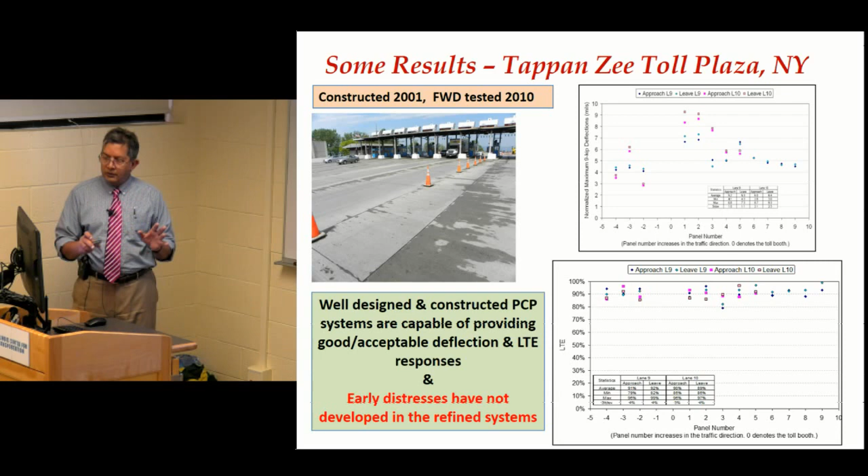We have done some testing to evaluate the performance. As you can see, very good deflection response, good load transfer, and we haven't seen any serious issues with performance for projects that have been in place for 10 to 15 years now.

So summarizing, this is a new technology in place for about 15 years. But we know that well-designed, well-constructed systems can be installed rapidly and can be expected to provide long-term service. There's room for new systems and refinements to continue improving efficiency. And importantly, contractors who have not had prior experience with it are able to perform this work.

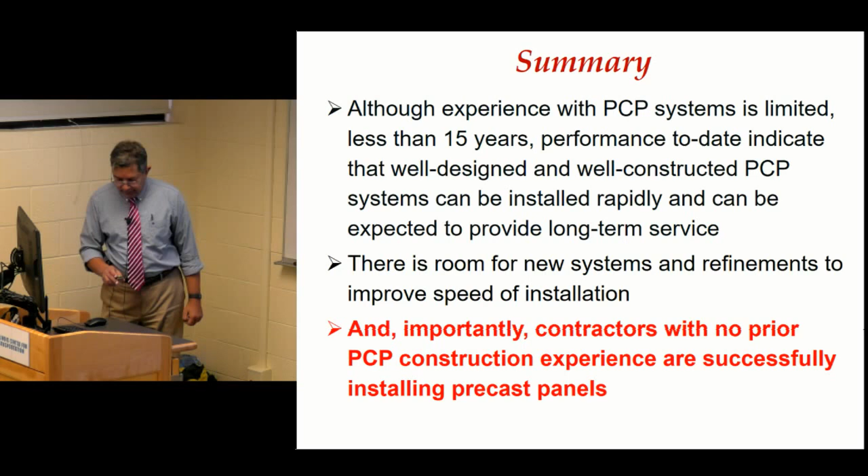What is the relative cost of performing that work in a short span of time? I'm glad you asked, I forgot to mention it. Back in 2001, when we were just doing the first few projects, it was about $900 per square yard, compared to the so-called rapid-setting repairs, which were about $200 to $250 per square yard. Now this is costing us about $300 to $400 per square yard, depending on the number of panels involved.

The rapid setting has come up too, that's costing us about $300 to $350 per square yard. So there is some difference, but when you consider the long-term risk of one material versus the other, precast stands out and looks much better.

How's the performance of those bedding materials doing? Over the years we've always had trouble with grouted joints and stuff like that. Earlier we were using sand bedding material, and in many of the projects they exhibited some cracking in the panels. There may have been other reasons too, but it's just that the bedding material is not stable, it could wash away, etc.